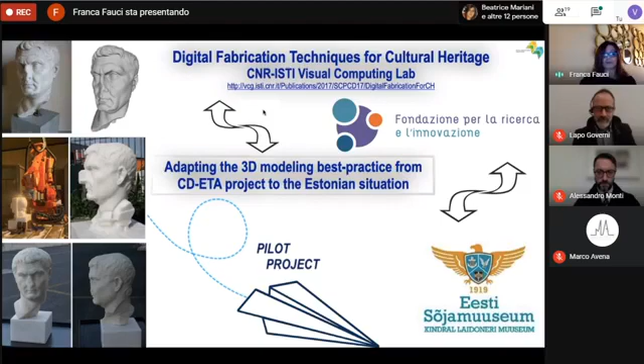Now, together with our policy responsible authority, we are focusing on keeping the project plan on track with a careful monitoring strategy based on a continuous interface between us and our stakeholders. Our main aim is to maximize the project's potential impact and ensure that the new knowledge and results have a direct influence on the relevant policy framework.

So we really wish that our action plan will bring added value to the territory and the stakeholders concerned. Our action plan, the main and key output of the CD-ETA project phase 1, will be specifically described in its genesis and implementation from the very early stage up to the startup of phase 2 and beyond, by Alessandro Monti. The floor is yours.

The screen is yours. Thank you so much, Franca. If you can, okay, I will try to share my screen. Okay, here we are. You should see it now. Yes, we see. Fantastic. Okay, yes, thank you.

So the action plan, as you can see, our project had two main souls: a technological one, which was all the best practices we gathered all around Europe in order to digitize natural and cultural heritage. But the other problem was to put all this information, all these outcomes, into something that could be easy to exploit, especially for public stakeholders, our action plan.

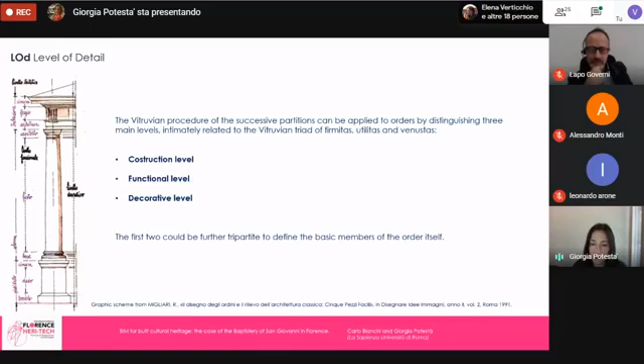Once we define this distinction, we try to define different levels for the level of detail, starting from the Vitruvian triad of Firmitas, Utilitas, and Venustas. We distinguish three different levels: a construction level, in which we can define the structural parts, for example, of an architectural order; the functional level, in which we can define all different parts of the order; and then the decorative level, according to the definition made by Riccardo Migliari in 1991.

Starting from this, we can make a redefinition of data flow in the digital process through LODs, in which we have the distinction inside the level of development into level of geometry and level of information, but we also define other thematic levels, such as the level of detail, the level of reliability, which defines the accuracy of each model element, and also the level of evolution, which can represent each building phase of the monument. Here you can see an application on the right side of the level of detail on a column, the level of reliability.

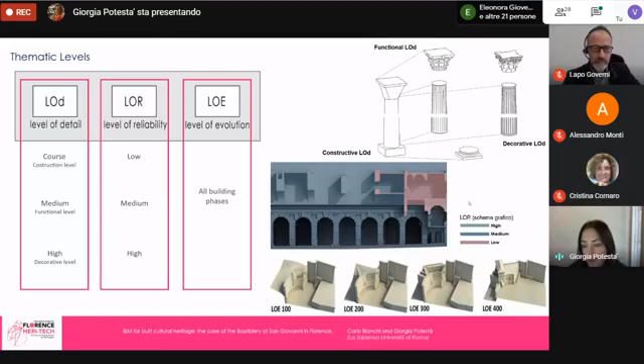An application of the level of reliability at the Tempio del Divo Claudio in Rome, and also an application of level of information on the Casa dei Cavalieri di Rodi, also in Rome.

The methodological approach of this research is based on four phases: the knowledge phase, which is the creation of a database of information, historical information about the monument, and also the TLS survey of the Baptistry of San Giovanni; the breakdown phase, in which we define all the ontological elements of the architecture; the reconstruction phase; and then the dissemination phase, in which we make a validation of the H-BIM model.

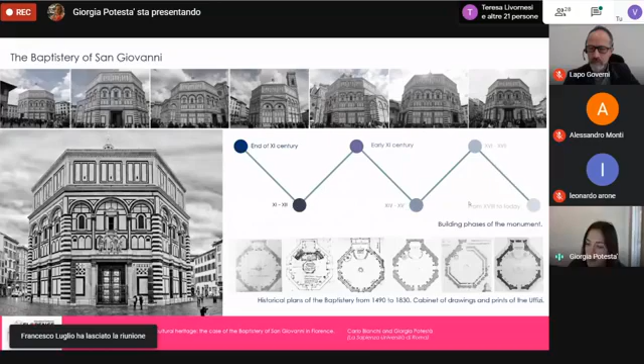So for the first phase, we start with the definition of all building phases of the baptistry, and you can see also a collection of historical plans starting from 1490 to 1830.

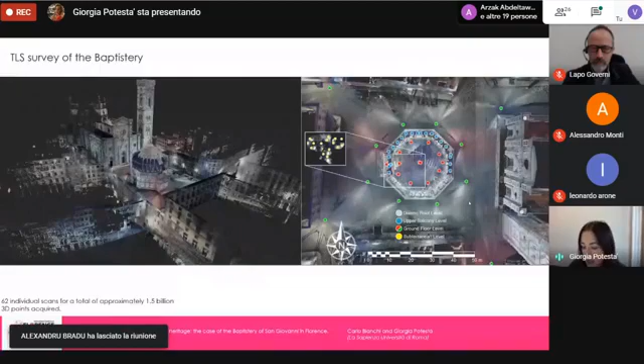This is the TLS survey that was conducted by the University of California, San Diego. On the right side, you can see all the scan positions, and also an application of GPR analysis. This is an important analysis because thanks to this, we can define the thickness of the marble slabs inside the monument, which are more or less 8 centimeters.

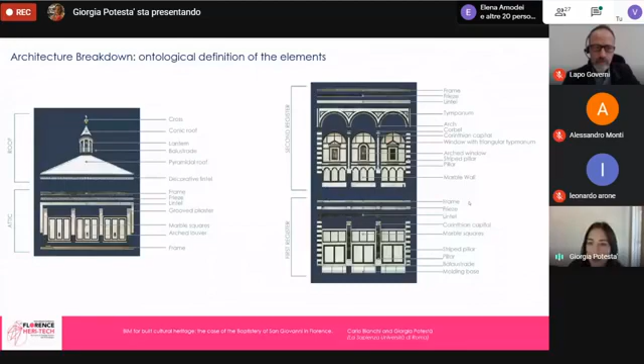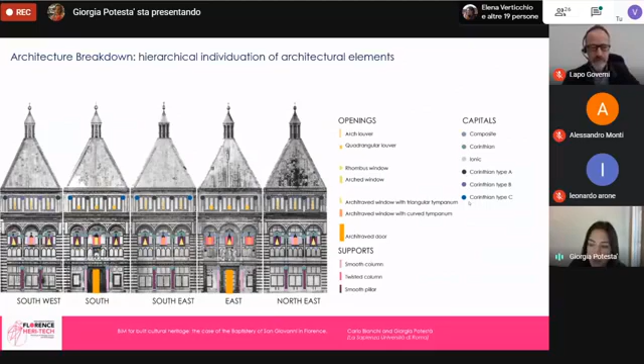Thanks to the breakdown, we can define all the ontological elements of the facade, and also on an orthophoto we can make an identification of hierarchical architectural elements such as openings, supports, and capitals.

For the third phase, that is the reconstruction of the geometry, we can define two different categories: architectural elements and decorative elements. The architectural elements are replicable inside the model, so we use internal modeling starting from Revit families, system families, nested loadable families, and local families. For the decorative elements, we use external modeling starting from mesh modeling.

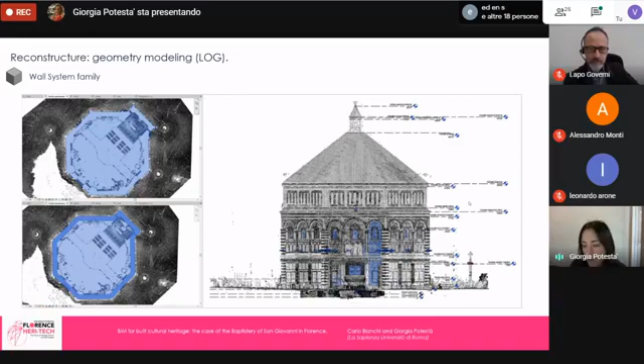Here you can see the reconstruction of walls using system family, and then we can define also the internal stratigraphy of the wall, starting from the information gained from the historical research.

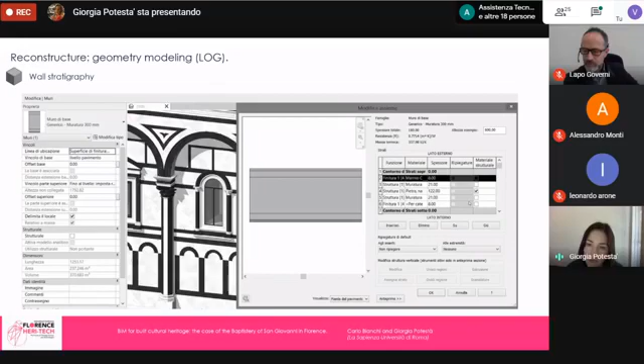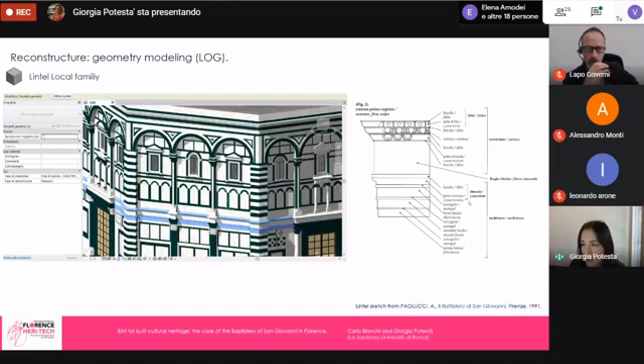All lintels and moldings are modeled by local family. On the right side, you can see a survey profile made by Paolucci in 1991.

For the columns and pilasters, and also for windows, we use a nested family. Here you can see the individuation of all different types of columns and pilasters.

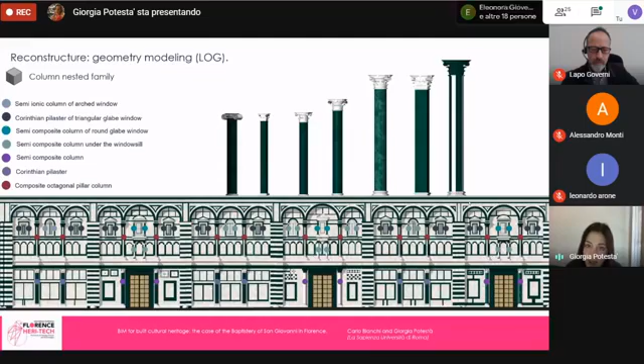Here you can see the parametric modeling of the octagonal pillar column. On the right side, you can see all the parameters and formulas. And here also the capital modeling.

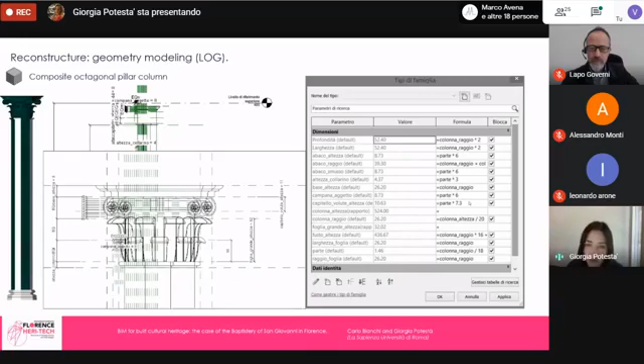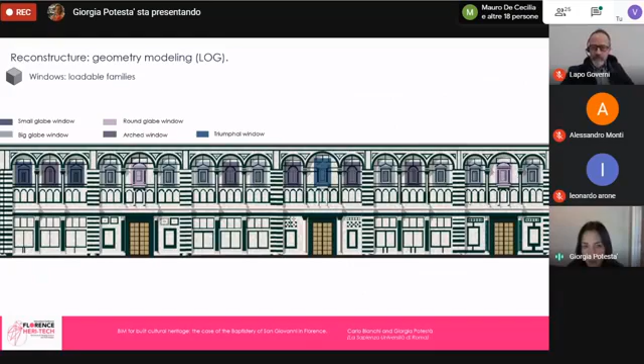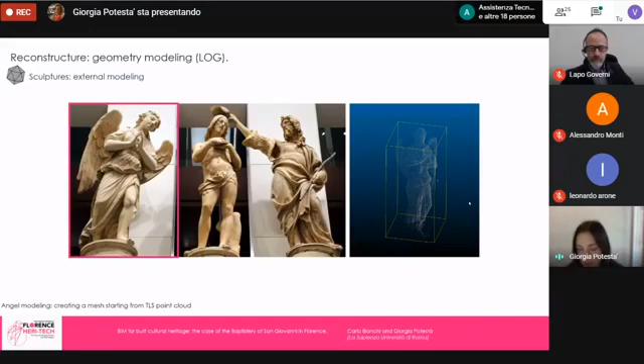For the sculptures that are decorative elements of the architecture, we use external modeling. Starting from the point cloud, we import the point cloud of the angel sculpture inside Cloud Compare, and then use MeshLab in order to make the mesh modeling. Then we import the same mesh inside Revit.

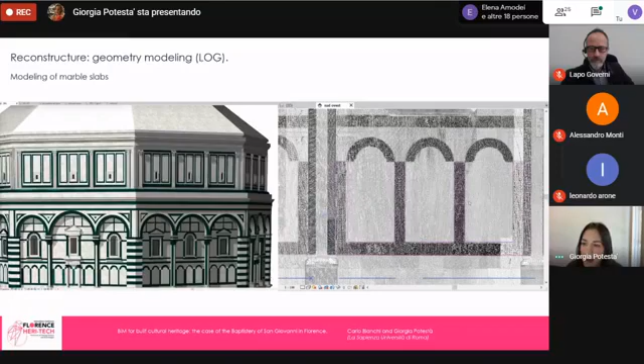For the marble slabs, we use the point cloud as a base, and we use the surface divide tool in order to make a division of the wall surface, and then we can apply all different materials. Here you can see the database of the materials for both structure and marbles. The two main important marbles are Carrara and Verde di Prato.

For the level of information, we can insert in the BIM platform also information about the building phases. Here you can see all building phases of the monument, and here you can see an application of each modeled element.

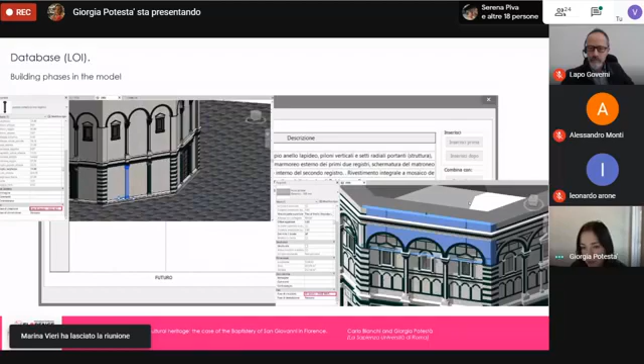For example, pilaster and then arched wall. Here you can see the graphic expression of level of evolution of the baptistry. So we can create a lot of different views for each building phase of the monument.

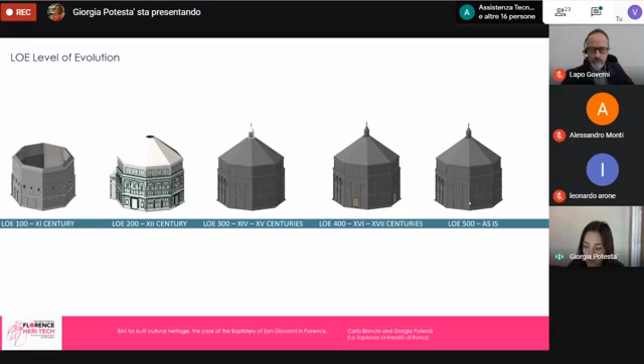Same thing for the thematic level regarding the level of reliability. On the right side, in fact, you can see the validation of the model between the surface model and the point cloud, using the Revit plugin Point Layout.

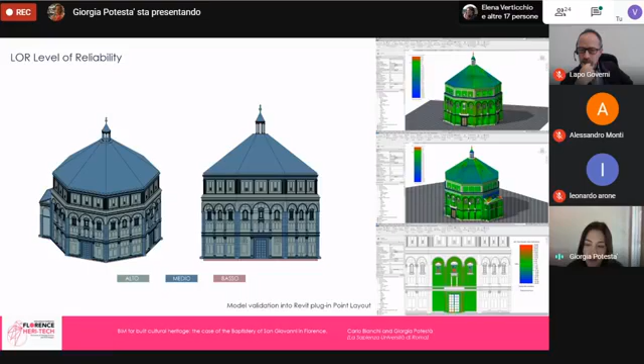On the left side, you can see a graphic expression of this on the HBIM model, in which you can see three different levels for the level of reliability: low, medium, and high accuracy. Thanks, that's all.

Okay, thank you, Giorgia, for your presentation. Very interesting work. Does anybody have questions for Giorgia Potestà?

I don't know if anybody used the chat for asking questions. No, apparently not. And I'm sorry, but I missed some of your words because of the microphone issue. I don't know if it was only me or other people too.

I would like to ask you simply about the last things you said, about the reliability qualification of the reconstruction of the baptistry. Can you please repeat what software was used to compare the point cloud with the 3D modeled architecture? Of course, we use a Revit plugin called Point Layout that can compare the differences between the point cloud inside the Revit model and the surface model.

Okay, so is this comparison performed only from a purely geometrical point of view, or also from a texture point of view, for instance? Do you have a distance plotted in the colored map you've shown us, don't you? Yeah, the color map expresses a deviation.

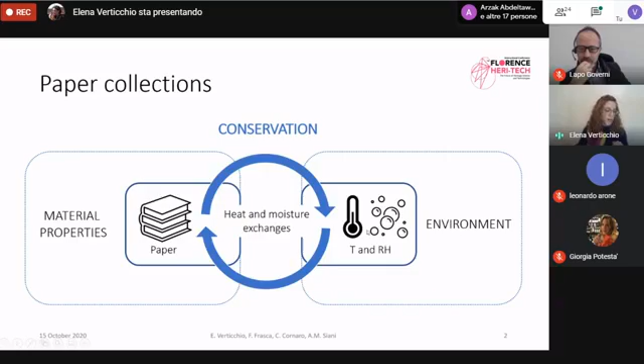Relative humidity in particular is crucial in paper conservation, as it plays a key role in all the deterioration mechanisms affecting biological, chemical, and mechanical processes involving paper.

Moreover, it is important to take into account that hygroscopic materials, such as paper, can act as buffers over relative humidity fluctuations of the environment by continuously exchanging moisture with the surrounding air.

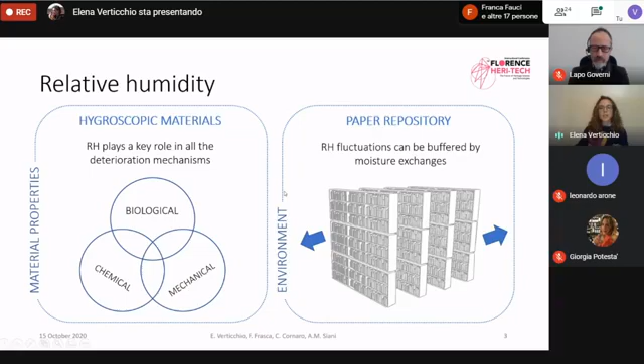The hygroscopic behavior of paper collections can be modeled using hygrothermal tools, such as those of the HAM family, which stands for heat, air, and moisture. These tools are mostly used to simulate the simultaneous heat and mass transfer through porous envelope materials, but they have already been successfully employed to account for heat and moisture exchanges within paper repositories.

In this study, IDA-ICE software for the simulation of indoor climate and energy will be used, coupled with the HMWall model for monodimensional heat and moisture transfer across walls, to model densely packed shelves made of paper books as walls having the same adsorption and diffusion properties as those of paper.

To the author's knowledge, the HMWall model has never been tested so far in the modeling of hygrothermal conditions within this kind of environment.

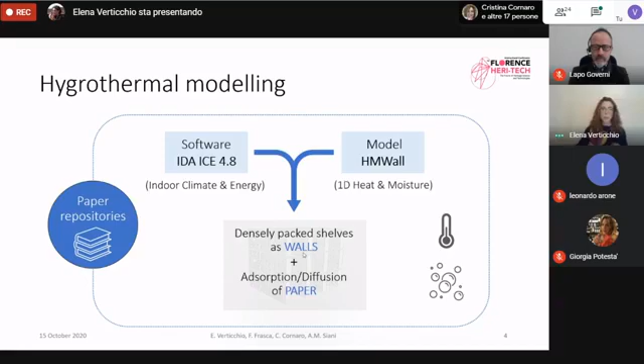Among the HMWall model governing functions, the adsorption isotherms are calculated as a function of the relative humidity, marked here as phi, expressed as a value between 0 and 1.

The equilibrium moisture content, W, is assumed to be little sensitive to temperature changes, and the hysteresis is usually considered negligible for the scopes of this simulation.

The moisture storage curves of experimental data on historic and modern paper types were fitted using this equation, minimizing the discrepancy at phi equal to 0.5, which equals relative humidity equal to 50%.

The benchmark value of 50% was chosen as it encompasses the condition recommended for the conservation of library collections, which are targeted to avoid the risk of paper becoming brittle when relative humidity is too low, and the risk of biological colonization when relative humidity is too high.

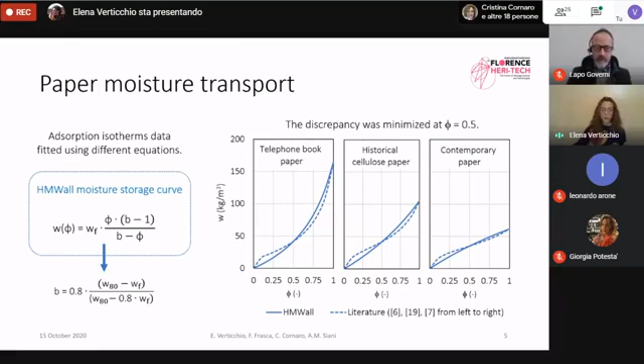A literature survey was conducted to obtain an overview of the available experimental hydrothermal properties for common types of both modern and historic paper found in library and archival repositories.

To understand the influence of this kind of variability in the hydrothermal simulation of moisture gradients across a paper wall, a preliminary sensitivity analysis was conducted in order to identify the most relevant hydrothermal parameters in the simulation of moisture gradients across a single paper wall.

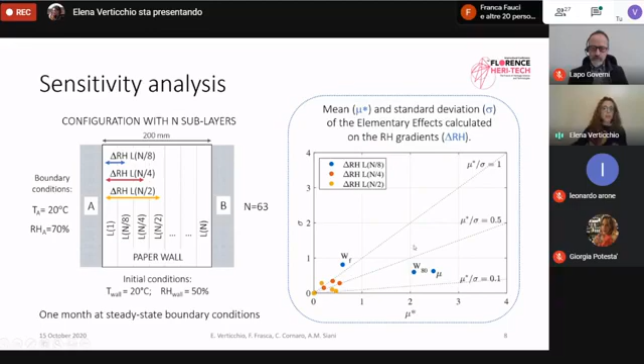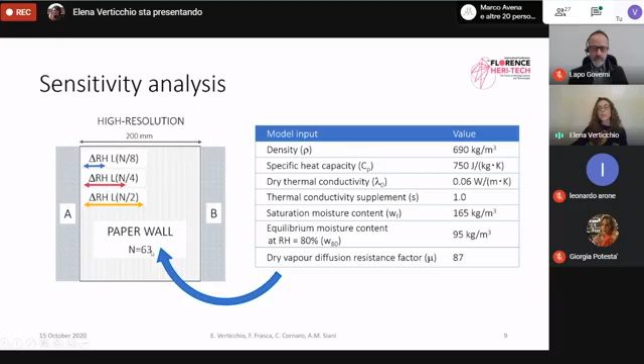For this reason, it was reasonable to assign the paper wall model a high resolution inside, showing 63 equally spaced sublayers using these values, and using the HMWall model to simulate the hydrothermal exchanges inside.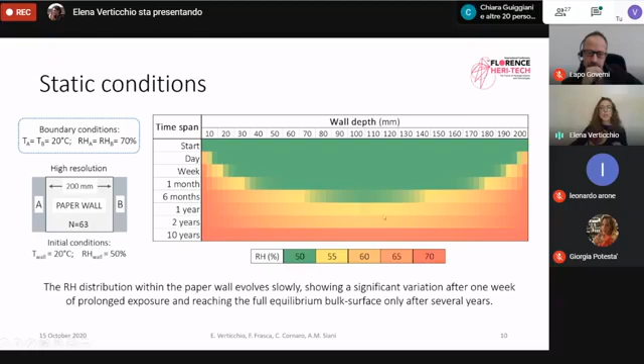First, the hygrothermal behavior of the paper wall model was tested in steady state conditions, where boundary conditions were fixed to, again, 20 Celsius degrees and relative humidity at nodes A and B equal to 70%. As you can see from the carpet plot on the right, the relative humidity values obtained within the paper wall model evolve slowly, showing significant variation only after one week of prolonged exposure to the boundary conditions, and reaching full equilibrium between the bulk and the surfaces only after several years.

Then the influence of the number of sublayers used in the paper wall model was tested in steady-state boundary conditions. Here you can see from the histograms the relative humidity values obtained at the same depth within the paper wall model by using a different number of sublayers.

For sublayer numbers 63, 31, 15, and 7, the associated thickness was 3, 6, 13, and 29 millimeters respectively. As you can see from the picture, a significant underestimation of the computed internal gradients can be introduced because of the averaging operation over a too large sublayer thickness, especially in the most external sublayers.

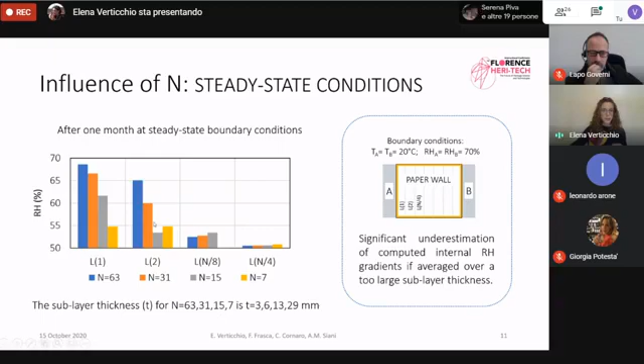Then the influence of the number of sublayers in the paper wall model was tested also in dynamic conditions, by using the high-resolution paper wall model with n equal to 63 equally spaced sublayers.

The model was tested in the simulation of relative humidity at different depths, where the boundary conditions were temperature equal to 20 Celsius degrees and relative humidity periodically ranging from 30 to 70 relative humidity at weekly, monthly, and seasonal frequencies. As you can see, only the first 5 sublayers, corresponding to the first 15 millimeters under the wall surfaces, are the most responsive to the external boundary forcing.

Here in the graph for the seasonal frequency, for the sake of brevity, only the sublayers differing more than 10% from the preconditioning values were represented.

Even if the high-resolution paper wall proved to provide more accurate results, it may nevertheless increase too much the computation effort when included in whole building simulation models. For this reason, a simplified model was proposed and tested.

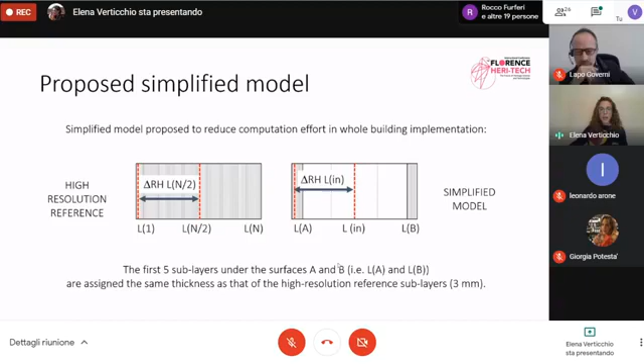For the high-resolution reference, the relative humidity gradient was calculated as the difference between the relative humidity at the bulk of the paper wall model and the relative humidity at the most exterior sublayer, called L1. In the simplified model, the relative humidity gradient was calculated as the difference between Lin and LA, marked here. The results of the simplified model were tested in comparison with the high-resolution reference.

Here you can see two scatter plots representing the relative humidity gradient obtained with the high resolution reference, together with those obtained with the simplified model. As you can see, both in static and in transient conditions, the simplified model is able to reproduce the behavior of the paper wall model.

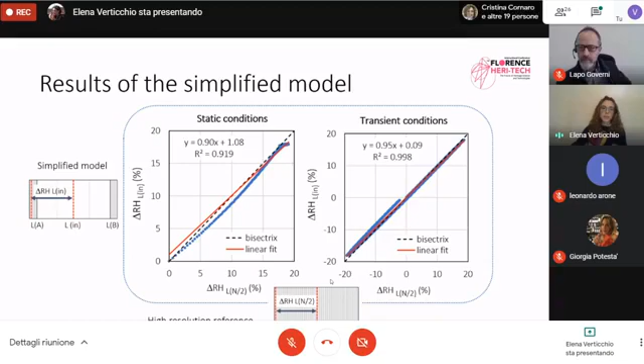And thus, it is reasonable to conclude that it can be used as an alternative to the high resolution reference in whole building implementations. Well, to summarize, in this presentation, the capability of the HMWall model coupled with IDA ICE was investigated.

In the simulation of the monodimensional heat and moisture transfer across a single paper wall model, at first, a literature survey provided the hygrothermal properties measured in paper, and then a sensitivity analysis was performed.

In order to identify the most influencing parameters on the relative humidity gradients inside the wall, it was found that the equilibrium moisture content at 80% relative humidity and the moisture diffusion resistance factor were the most influencing parameters. Then the number of sublayers used in the wall model was tested in both steady state and transient conditions, and it was found to significantly affect the relative humidity gradients and outputs at various depths within the paper wall.

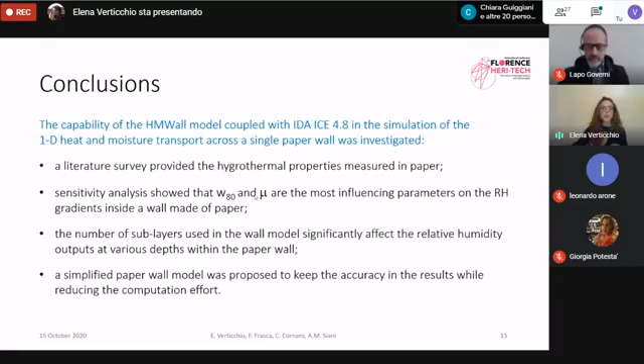Finally, a simplified paper wall model was proposed, and it was tested, proving that it was able to keep the accuracy in the results while reducing the computation effort. With this, I concluded. So I hope you enjoyed the presentation. If you have any question, I'm here to answer.

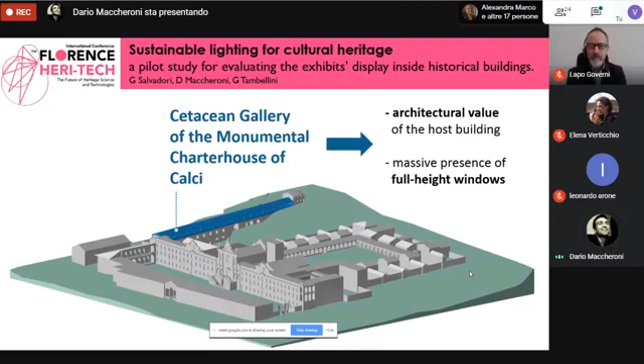The daylight factor-based and the measurement-based approaches were applied to a case study, the Cetacean Gallery of the Monumental Charterhouse of Calci near Pisa. The gallery was chosen for the architectural value of the host building and for the massive presence of large full-height windows on both north and south-oriented facades.

The analyses were run both with software simulations and on-site measurements. To validate the model for the simulations, the horizontal illuminance was recorded using a light meter.

So the Monumental Charterhouse is located in Calci near Pisa. It was founded in 1366 as a Carthusian monastery, and nowadays the original structure has almost been completely lost. The major modifications started during the priorate of Alfonso Maria Maggi between the 18th and 19th centuries, and continued during the 20th century due to the First and Second World Wars.

In fact, during the First World War, the Charterhouse was occupied by the 32nd Field Artillery Troops. Then it was converted into a backup field hospital, and later, in 1939, into an emergency storage for artworks in case of war.

Finally, in 1979, the last monks left the monastery and the Charterhouse was partly donated to the University of Pisa. In 1981, the University of Pisa inaugurated the Natural History Museum, and nowadays the Charterhouse hosts the Natural History Museum and the National Museum of the Charterhouse.

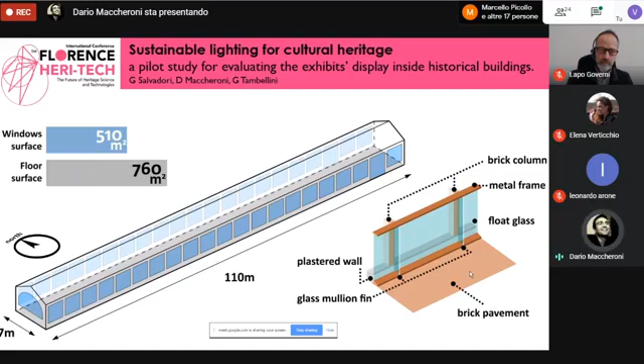The gallery hosts the most important Cetacean skeletal collection for number of species in Italy, and it is the only collection in the world displaying at the same time skeletons of the 3 biggest non-extinct animals. The collection is formed by 28 skeletons, 11 life-size models, 36 scaled models, and 9 thematic areas.

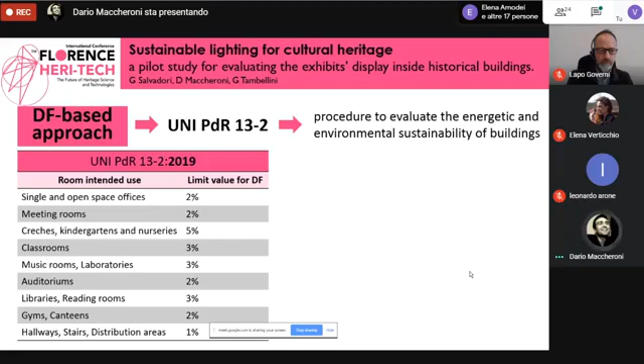For what concerns the daylight factor-based approach, the UNI PdR 13 Part 2, 2019 version, provides a procedure to evaluate the energetic and environmental sustainability of buildings. The procedure was developed by ITACA, the Italian institute dealing with tenders for sustainable development. This procedure suggests daylight factor upper limits depending on the room's intended use. For museums and exhibition halls, no values are provided.

Nevertheless, in the previous version, a daylight factor of less than or equal to 1% was suggested for this category.

For what concerns the measurement-based approach, the standards to refer to are the EN 16163 and the decree of the Italian Ministry of Cultural Heritage. These standards explain how to measure lighting for cultural heritage, and they suggest two metrics to monitor its conservation: the maximum illuminance and the total annual exposure.

The upper limits depend on the photosensitivity of the exhibits, and they vary between the Italian and international standards. As far as bones and skeletal specimens are concerned, the Italian standard is the more restrictive one, and it indicates a maximum illuminance of 150 lux and a total annual exposure of 500,000 lux-hour per year.

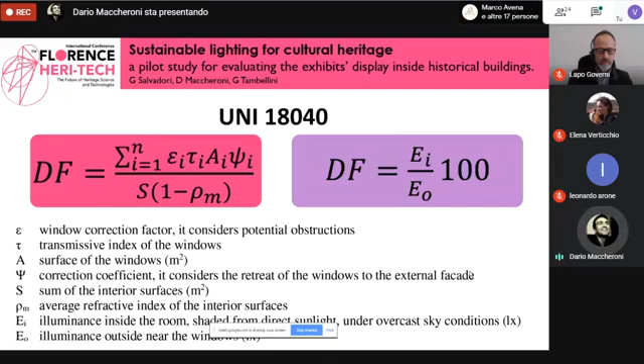The advantage of the daylight factor approach is that the calculations are easy and they do not require specific surveys. In fact, the only information necessary is the geometry of the room, the geometry of potential obstructions, the geometry of the windows, their transmission index, their surface, and finally the reflective indexes of the interior surfaces. This information can be easily acquired. Moreover, the indexes are tabulated depending on the materials and their colors.

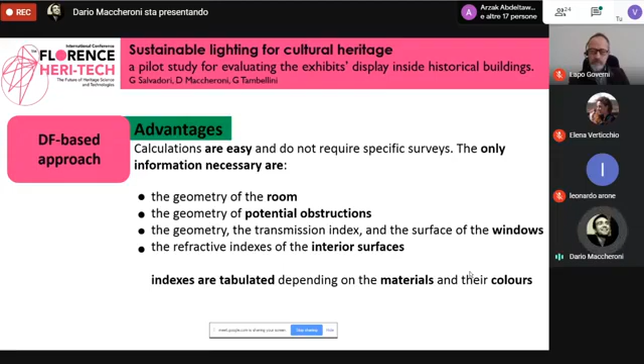It should also be noticed that the daylight factor equation does not depend on the window's orientation nor on date or time. In addition, the indoor illuminance must be recorded under overcast sky conditions. However, the actual representativeness of the overcast sky for the site in exam is not implicit.

In the case study, the daylight factor was calculated using both the equation and software simulations. The measurement-based approach provides more accurate results than the daylight factor one. However, in order to evaluate the total annual exposure, an annual measurement campaign is required.

For the pilot study, it was impossible to directly measure the total annual exposure, as it would have required performing an annual measurement campaign. In fact, that is the main shortcoming of the measurement-based approach.

However, under certain conditions, the annual measurement campaign can be substituted with software simulations. In the case study, the total annual exposure was calculated using software simulations.

In order to use software simulations instead of an annual measurement, it is necessary to develop a model. The model must accurately represent the examined room: its geometry, materials, characteristics, colors, and surfaces. Finally, the model must be calibrated.

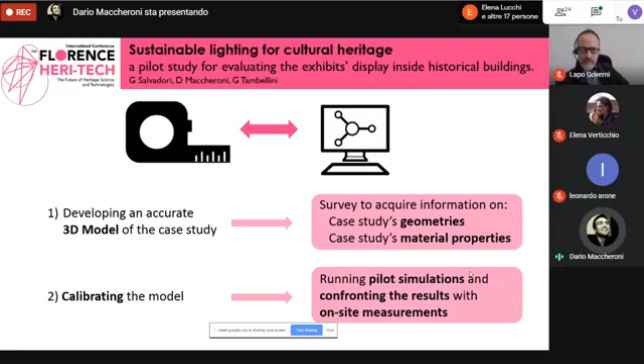This can be achieved by running some pilot simulations and then comparing the results with on-site measurements. The measurement campaigns needed for the calibration are considerably shorter than the previously mentioned annual ones.

In the case study, the simulations were run using climate-based data, meaning that simulations are based on the actual meteorological conditions of the site in exam, and therefore they can deliver reliable results. The results obtained in both approaches suggest anyhow that the cetacean gallery is overlit.

However, the results obtained using the daylight factor-based approach provide less information. They give no insights into the actual lighting conditions of the exhibit. This means that the daylight factor-based approach is not well suited for in-depth analysis, even if it's acceptable for first instance evaluations.

On the contrary, the measurement-based approach provides useful information that lighting designers can compare to standards' requirements. Still, for this approach to be applied, one would need to accept the costs and length of annual measurement campaigns. It is true that this step can be circumvented using reliable simulations, but these must always be validated. Therefore, a measurement campaign cannot be totally avoided.

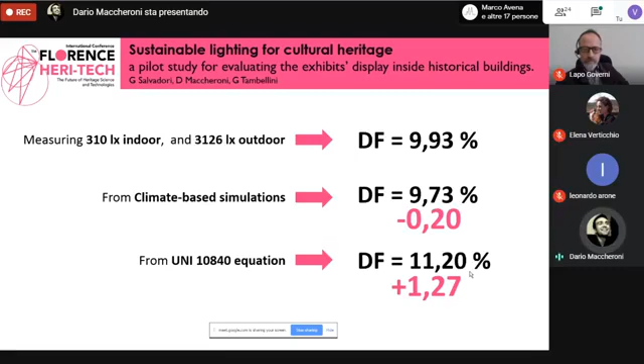These errors demonstrate that climate-based simulations are reliable, therefore they can be used for the estimation of the total annual exposure without recurring to annual measurements. Nevertheless, on-site measurements are necessary to validate the simulation's accuracy.

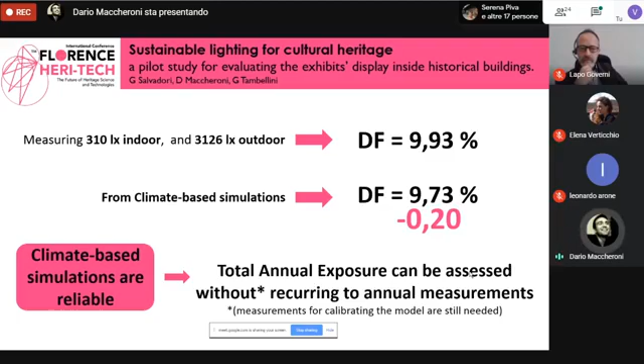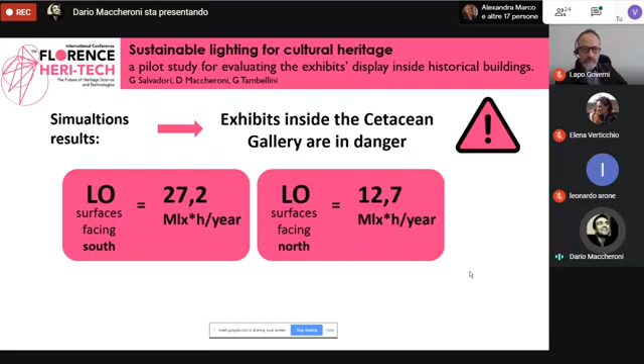So finally, the simulations demonstrate that the exhibits inside the Cetacean gallery of the Charterhouse of Calci are in danger. The deviation from the limits set by the standard is extremely relevant. Therefore, an intervention to secure the exhibits is urgent.

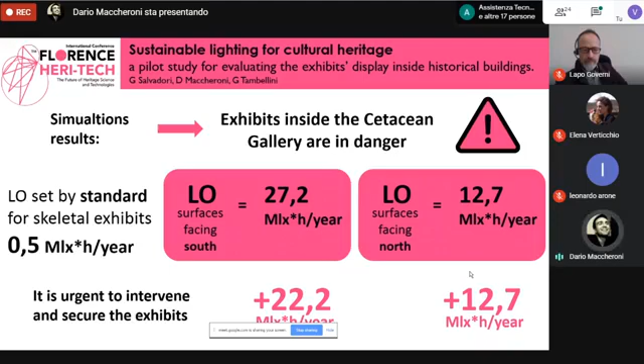The pilot study suggests that both the daylight factor-based and the measurement-based approaches can provide information on the exhibit's lighting conditions. However, it is not advisable to use the daylight factor-based approach for in-depth analysis due to its oversimplifications. On the contrary, for such analysis, the measurement-based approach is recommendable, even though it requires major cost for the measurement campaign.

Considering the overall sustainability of the two approaches, it is clear that the measurement-based one is the most favorable. The economic costs are compensated by the accuracy of the acquirable data. In fact, it is fundamental to recall that sustainable lighting cannot be confined to the economic sphere, but it must consider the conservation of the exhibit considered as resources.

The measurement-based approach can provide more accurate information than the daylight factor-based one. Therefore, it can help monitor the exhibits more adequately.

So finally, the authors believe that a scientific standardized procedure to evaluate the exhibit's display conditions and to compare potential interventions is desirable. Such a procedure would allow to follow a repeatable approach, meaning that various courses of action could be compared to find the most adequate one.

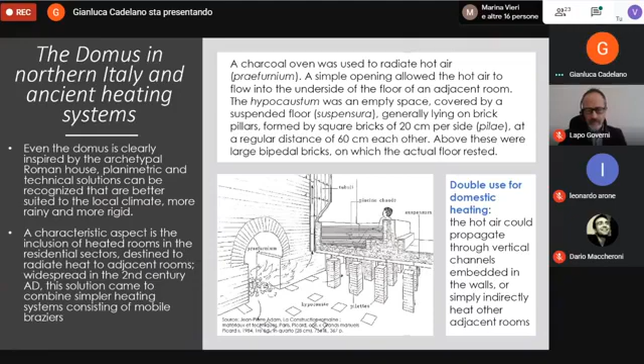After this necessary introduction of some building aspects of Roman private housing, here is our case study: the well-known Domus of Piazza Nogara, the remains of which can be visited in the basement of Banca Popolare di Verona, in the historic center of the city.

The Domus was built in the Augustan age and has undergone several renovations over time, up to the 6th century, where it was abandoned following a fire. In this study, we look at a specific period in history, namely the 3rd century.

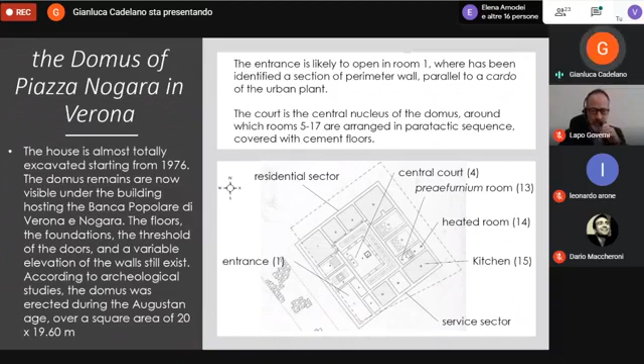The Domus develops around a central courtyard, and two main districts can be distinguished: the residential sector, where the banquets were held, and the service rooms, dedicated to the servants and the kitchen. According to the dictates of Vitruvius, the rooms labeled 13 and 14 are adjacent to the kitchen and are respectively the room of the praefurnium and of the hypocaustum.

The fireplace and the pilae that supported the heated floor are still there. However, in the short elevation that has come down to us, no traces have been found of hydraulic pipes to supply water to the balneums, nor of channels for an aerating system inside the walls. Therefore, an indirect heating system is hypothesized, where the high temperature inside the sauna, by heating the walls, could have had a thermal effect on the nearby rooms.

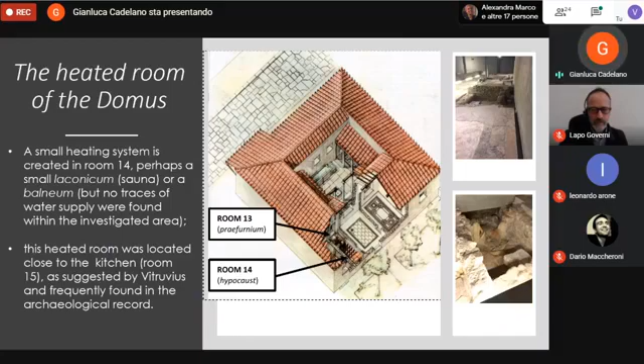Where archaeological studies have stopped due to lack of further material evidence, a small step towards understanding Roman construction principles has been attempted with the methods I will describe. These methods are not typical of historical or archaeological research, but are borrowed from modern building engineering.

Through dynamic energy modeling and regulatory standards for evaluating thermohygrometric comfort in indoor environments, we try to understand whether or not the Vitruvius rules were applied in the Domus, and if they actually made sense from a microclimatic point of view.

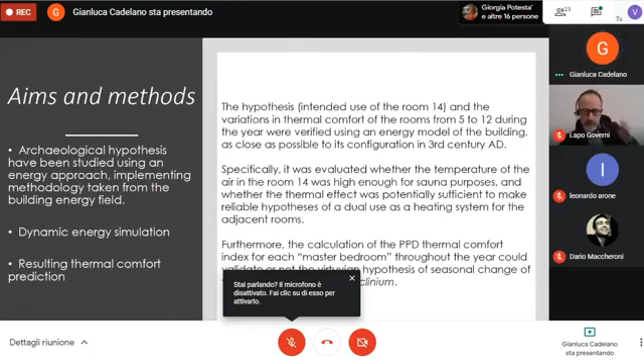We use dynamic energy simulation. That's basically a piece of software able to replicate the geometry of the building and its thermophysical properties in order to model its energy and thermal behavior under imposed boundary conditions. Like all computer codes, there are input parameters necessary to describe the building through algorithms. In general, the more accurate the inputs, the more reliable the outputs.

Now we will see the many inputs and how we tried to deduce them to the best of our possibility, based on the few remaining ruins of the Domus. Let's keep in mind that we want to model the Domus as it was in the 3rd century, under the boundary conditions of the 3rd century.

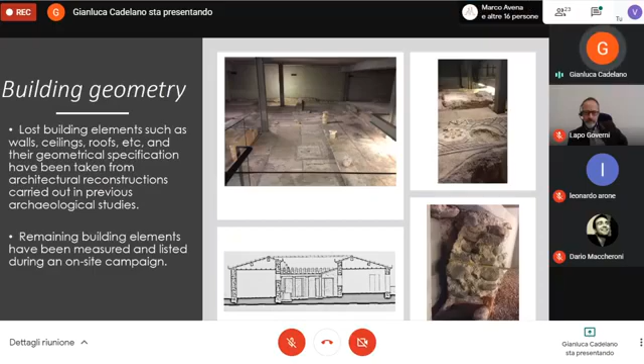The first input is the building geometry. The photo on the top left is the current situation of the Domus. All internal spaces and subdivisions are recognizable, and the door sills are still in place. The thickness and stratigraphies of the walls have been measured and catalogued. Regarding missing elements, such as roofs and windows, previous studies provided a possible reconstruction made on historical basis.

When considering climatic parameters for modeling the behavior of modern buildings, we usually refer to meteorological databases, which often date back only a few years. In some contexts, it is necessary to use freshly measured annual data, in order to avoid errors due to the obsolescence of these databases, even though they are only a few years old.

Add to this the sudden climate changes that all of us are directly experiencing nowadays. This is just to give an idea of what kind of madness it may seem to be, claiming to get decent climate data hundreds of years old.

Nevertheless, fortunately, very accurate studies have been concerned with reconstructing the temporal sequence of the climate over the centuries. This work is truly immense and includes interdisciplinary studies ranging from archival research to the knowledge of ancient measuring instruments, to geological and biological evidence. This is the limit of our knowledge, but it still allows us to have some data for modeling. The data are certainly not perfect, but at least usable, very usable, to make considerations that are not completely meaningless.

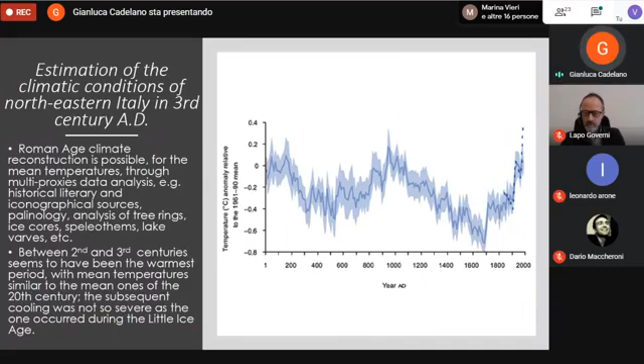Concerning the thermophysical properties of the envelope, the situation is a little better because we actually have some remains. This is fundamental, because obviously there are no databases or stratigraphies as for modern buildings. However, it was not possible to make direct measurements of the thermophysical properties on samples or in the field, due to issues related to the preservation of the Domus. For this reason, indirect approaches were adopted.

For instance, the properties of the structural elements were obtained by estimating the envelope composition, derived from the proportion amongst the raw materials constituting the walls, because we can still observe their sections.

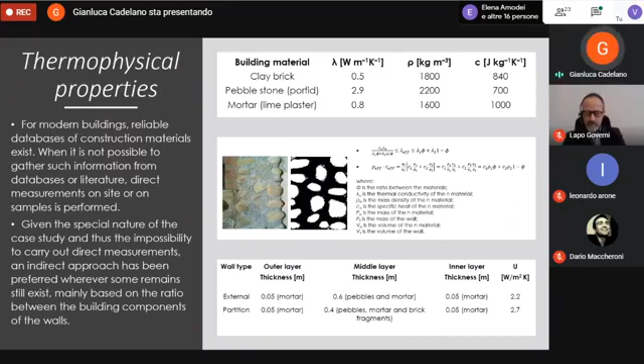The modeling of the domus made it possible to obtain a reconstruction of what should have been the temperature inside the various rooms over the course of the year in the historical period we consider. This allowed us to draw two interesting pieces of information.

First, the system consisting of room 13 and 14 was in fact able to raise the temperature up to 50 degrees Celsius, confirming that room 14 could have been used as a sauna. As for the dual function of the heating system for domestic heating, this was only partially true. In fact, only the immediately adjacent rooms are affected by the indirect thermal effect, leaving all other rooms substantially untouched.

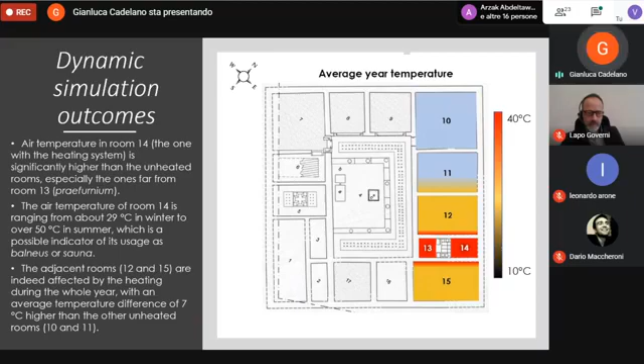Further considerations were made using another tool borrowed from modern environmental engineering. The studies of Professor Fanger, implemented by widespread international technical standards, allow us to predict the comfort perceived by people under certain thermohygrometric conditions. An empirical formula considers a multiplicity of parameters, including heat exchange conditions, humidity of the environment, physical activity, and the clothes worn by the inhabitants.

The result is a quantitative evaluation expressed by two parameters, PPD and PMV. The first represents people's dissatisfaction. The second is the sensation, a perceived level of heat or cold.

The metabolic rate for this calculation was imposed according to the tables in the regulation, considering a physical activity somewhat comparable to that of people reclining. The evaluation of the air speed took into consideration the building reconstruction made on archaeological basis from previous studies, because the actual elevation of the wall of the domus no longer exists.

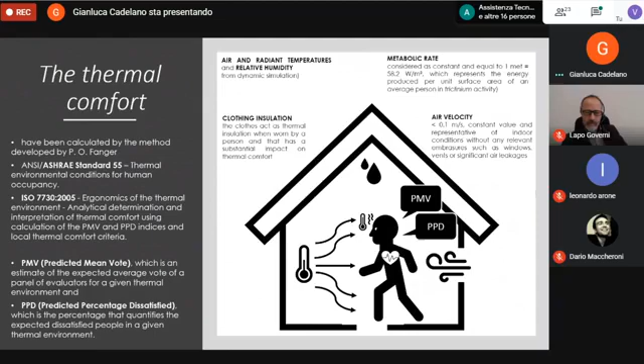Specific considerations were made to obtain the insulation value due to the garments. The values found in the tables of the regulation were not so useful because they are in fact applicable only to contemporary Western style clothes.

So in an effort to obtain reliable values, two types of bibliographic sources were considered: those concerning the fashion of ancient Rome, and scientific literature that applied the Fanger method to countries of the Middle East or North Africa. In addition, aspects such as the geographical location of the domus and the seasonal variation in the way of dressing were considered.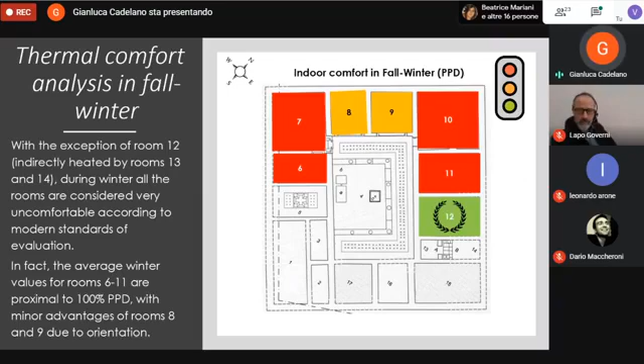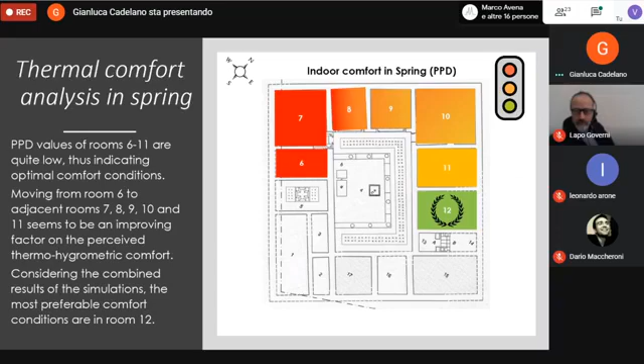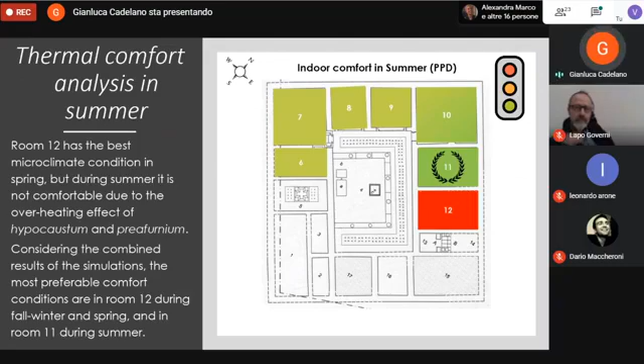Here are represented the levels of comfort perceived in the summer season of the 3rd century. Room 12 is now not comfortable at all during the summer, due to the overheating effect caused by the nearby sauna. Comfort conditions during the warm season are very good in all other rooms of the residential sector, especially in room 11.

So concluding, the question is: can the energy modeling of a building be useful as a tool for archaeological research? Despite the numerous difficulties encountered in evaluating an energy model as reliable as possible within the limits of our knowledge, this preliminary study has helped formulate somewhat more reliable hypotheses on the intended use of the internal space of the domus, and evaluate the effect of the hypocaust as a heating system. So I would say yes, as long as we take into account that there are always some gray areas that we probably will never cover.

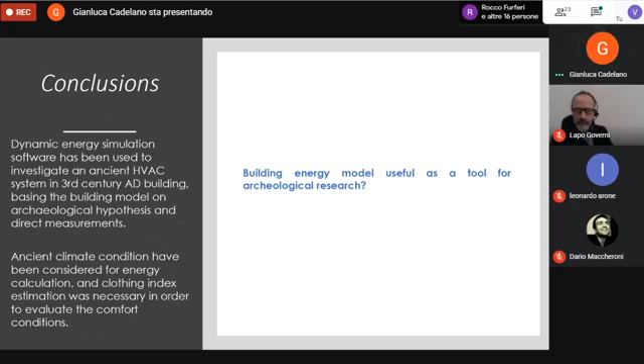And considering also those non-technical, non-engineering aspects, more social parameters, such as the real perception that the Romans had about comfort—which was probably much less sensitive and more accommodating than the modern standard we are used to—this is something we can never measure, of course.

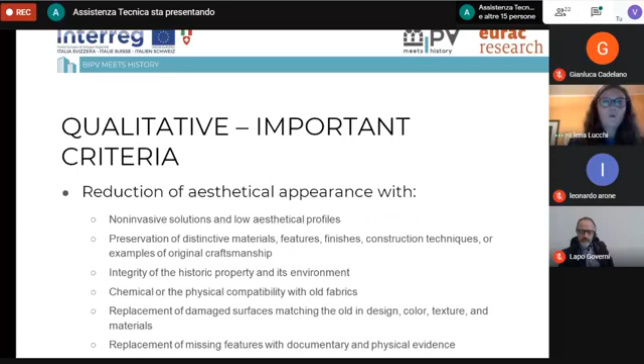Finally, quantitative criteria refer not only to energy production but also to the life cycle assessment of energy. But only a few guidelines consider this aspect, I think only 5 out of 50 guidelines. So this means the guidelines refer mainly to conservation aspects rather than energy or engineering aspects.

The last slide, just to conclude. In the background, as I told you before, it refers mainly to conservation and energy efficiency. Right now, there are eight barriers to the acceptability of these technologies, but in many cases these barriers refer to the absence of knowledge about the innovation possibilities of this system.

So this system can be completely customized. There are several colors, low visual aspect, low visual impact, and the most important problems refer to the legal framework.

Especially in Italy, we are developing a questionnaire survey to understand the most important barriers, and the legal framework and authorization process are important aspects for designers applying these technologies.

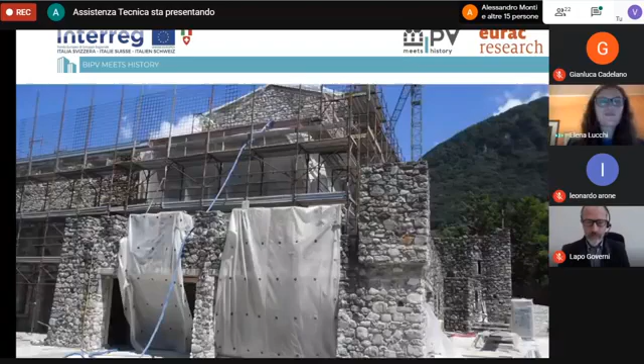In the last slide, you can go through it very fast. I show just several examples.

This is the Doragno Castle in Switzerland with a roof. The roof was not usable, was not secure, so they decided to have a massive production of electrical energy, using BIPV technologies.

This is an Italian case, Villa Castelli on the Como Lake. In the next slide you can see the roof was completely restored using transparent BIPV technologies. This project was developed with the help of the heritage authorities, so the system was designed ad hoc, starting from the nautic sector.

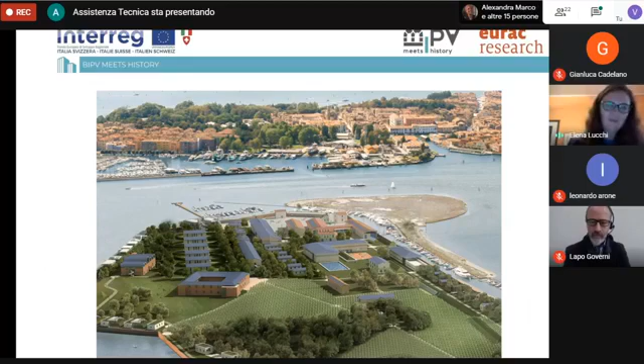The next slide is a very new, very recent project in Venice, on an island. This is the first step, with a massive use of BAPV, so not integrated technology, and also with massive construction. But after discussion with the heritage authorities, in the next slide you can see the new technologies.

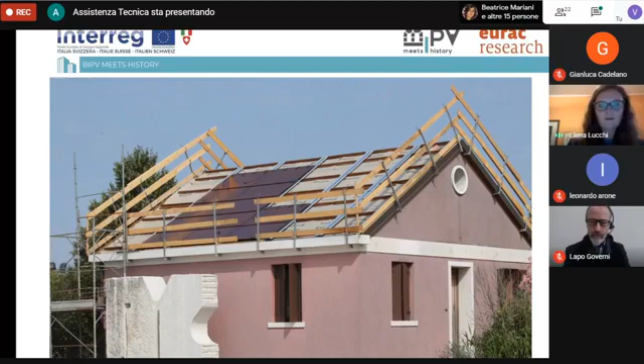This is the original roof, and in the next slide, the construction work, and finally the works using the hidden color BIPV technology. In the next two slides you can see the roof first, and the building in the area in the final slide.

Another project, a Switzerland project, in this case an Alpine building, a Maso. This shelter was built using hidden color BIPV technologies. In the next slide you can see the actual image of this building.

Another project presented in this contest award is named La Capanna, in Italy, near Florence. In this case they built this roof - the building was already built, but the roof was completely destroyed. So they decided to build this new roof with BIPV technology, with a very detailed study to avoid visibility of the system from the landscape.

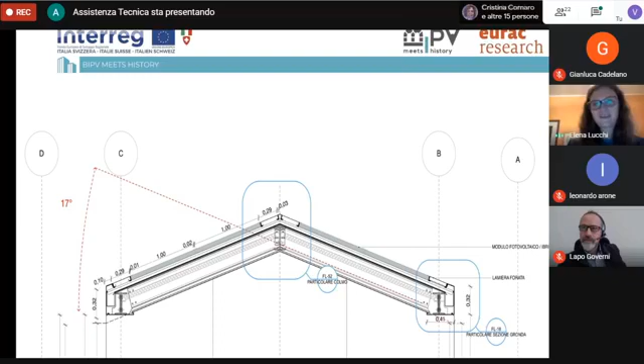And finally, as this is Florence Heri-Tech, I want to present the last case study, a bridge near Pisa with the integration of a photovoltaic system. That's the last slide. Thank you. If you have any questions, I'm here.

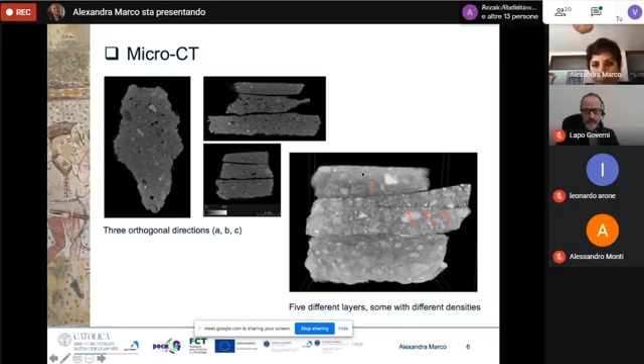Different colors were assigned to the different porosity models. Gray was selected for the total volume of interest, the VOI, with 80% transparency. Red, or pink, was selected for all the pores, and green for the open pores. One of the abilities of the micro-CT allied to a chosen software can be shown in this short video, where the porosity distribution is presented by means of the open pores in green, and all the pores existent in red, pink.

The 3D analysis of the porosity parameters is depicted in the upper table on the right, while the 2D pore size distribution analysis is contemplated in the lower table. The 3D analysis established that the sample has a very high percentage of total porosity. If on one side mural paintings materials are very porous, on the other the degradation process occurring in its inner strata increased that percentage.

SEM examination also confirms the poor condition of the mural, which is exposed to extreme humidity, lack of adequate cleaning and ventilation, with cult duties being performed only 2 days a week, and the other days closed. Although the painting surface doesn't seem to present severe porosity in the first picture, when the magnification is higher and the substrate is visible, granular disintegration is shown, as seen in the lower picture.

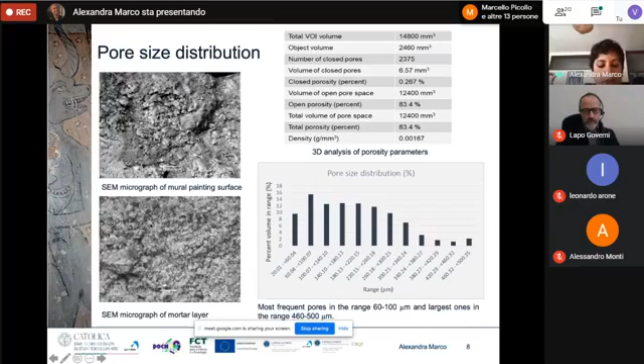A video was made to show the potential of the micro-CT for analyzing an object or sample in 360 degrees. It is a little slow, so I'm going to fasten it for this presentation. You can see the sample in 360 degrees all around, and you can take portions of the inner structure, freeze whenever you like, continue to see the inner structure, and rotate the sample up and down from top to bottom and all around again.

This investigation is at its beginnings. We would like also to know the content of salts and water, and to do a comparison of this data with other equipment that can estimate the porosity and content of salts in situ.

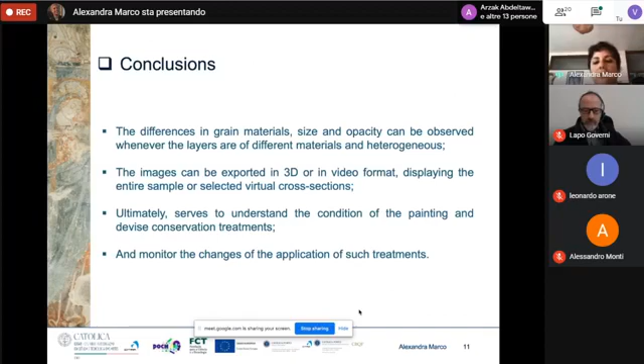Ultimately, it serves to understand the condition of the painting and to devise conservation treatments. It can also monitor the changes from the application of such treatments. I thank you. These are the acknowledgements of my PhD grant research, supported by the Foundation for Science and Technology. Thank you.